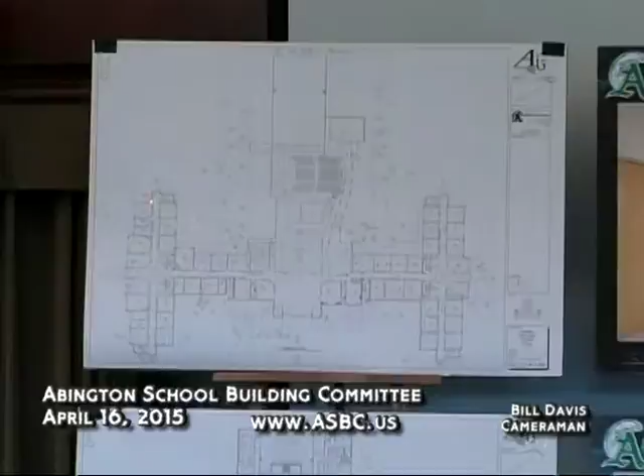What we've done here is benefited from the efficiency, the layout and efficiency of that with double-loaded corridors and the square footage, but we've changed the way we look at that corridor, and primarily the way the corridor wall, the demising wall between the corridor and the classroom, is positioned.

You can see with this rendering that each of the corridor walls opens up a corner to the classroom. So when you're looking down the corridor, you don't just see two parallel walls going down in a very closed-in institutional fashion.

Same with the end of the corridor — being able to see through along the corridor and to the outside with natural daylighting and views is extremely important. You can see that by doing that, we've effectively broken down the corridor into three zones within each of the wings, and allowed visual connection between the classrooms and the corridor.

We've adjusted the ceiling using a standard 2x4 integral linear fixture ceiling system, using patterns in the floor as well with the sheet linoleum product to create the zones and color variations. Durable materials on the walls, with porcelain paver tiles down low, and then a durable impact-resistant drywall for the walls.

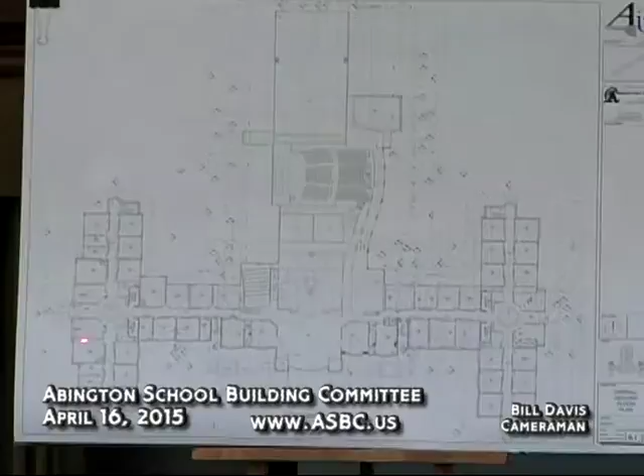So moving to the center core of the academic wing is the project labs, the maker-builder spaces. There are three vantage points of the maker-builder space.

The intention is to provide as much flexibility within this central core as possible, so that one classroom can come and do a project, multiple classrooms, or in fact you could take the floor or the academy and bring them into the center core with everything opened up as an assembly space.

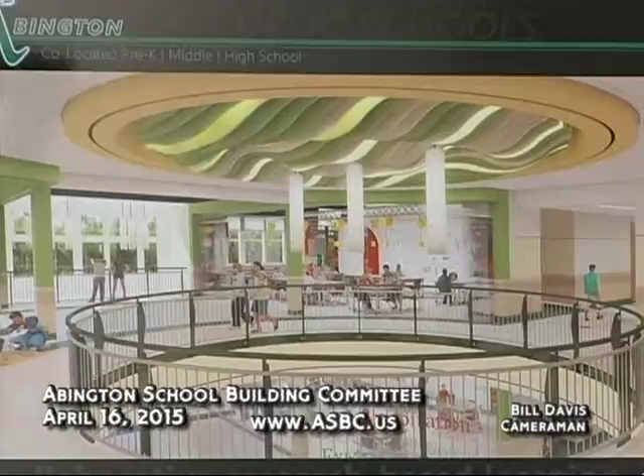What you see here are the three renderings. The first rendering, the top one here, is looking on the second floor across the space into this area here, this maker-builder space. Each of these is showing the floor penetration from the second floor to the first floor, and you can see through into the spaces on the lower level, as well as across to the spaces on that level.

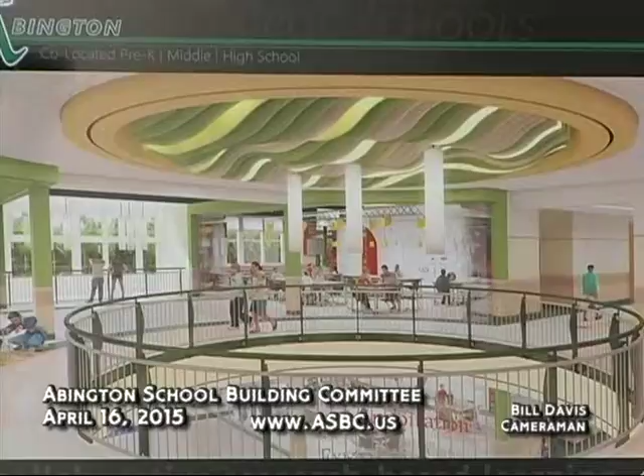The intent was to provide that visibility, that activity, the visual activity and the action, the inspiration that's going on within those spaces all day, so that the students see that work, be inspired by the work, and create interest and thought and inspiration of what's happening within the space.

So these areas are surrounded, in the majority of this section, by glass movable walls. Those are surfaces that can be moved open so that the entire area can be used, or just one room could be used, or one wall could be opened up and a portion of the entire space could be used.

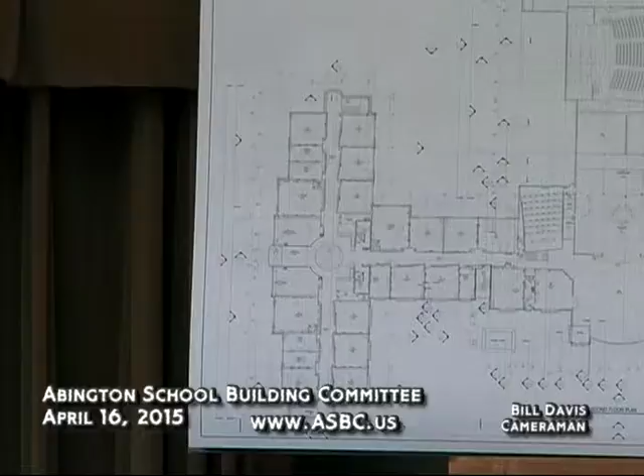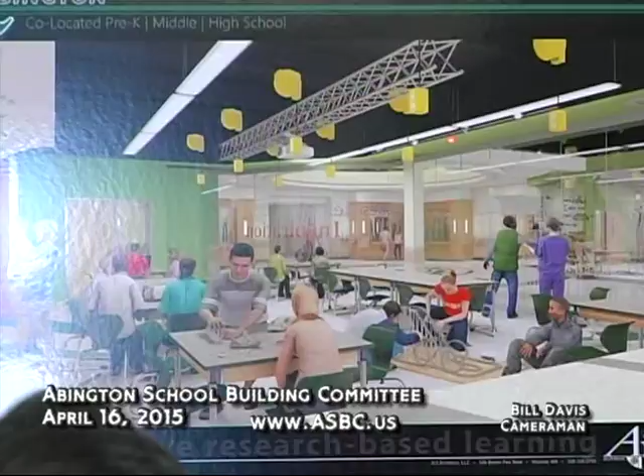The inside of the space is a very functional and flexible space as well. This particular vantage point is looking from this location across the space to this wall right here, and that's the primary work wall, teaching wall, where there's a 20-foot section of gypsum wall or drywall that has a painted surface that can be written on. So essentially, the entire wall, the students can use as surfaces to write on for research or diagramming, etc.

Flanking that wall, based on discussion with the user group, we tried to maximize the storage in that space and provide flexible storage. What you're seeing here is a rendered depiction of storage units, wall units that have the ability to place either bins or wire bins, plastic bins, any type of storage unit with flexible storage or flexible shelving. The size and configuration can be modified within these locations on either side of that writable surface.

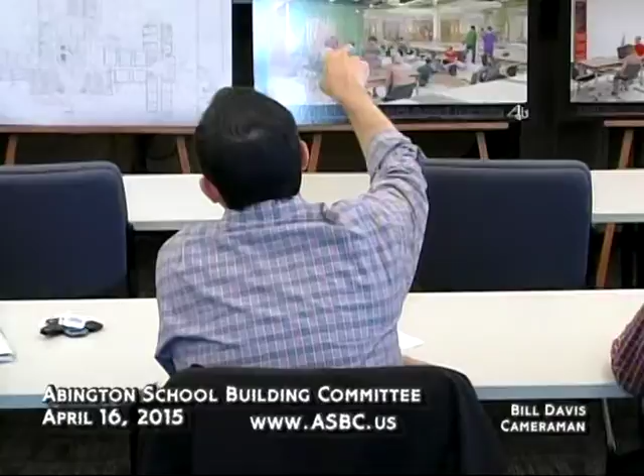So, right, see, there's in the corridor a datum at the top of the doors, 7'2" or whatever. Underneath that, are there areas for tacking posters or things like that?

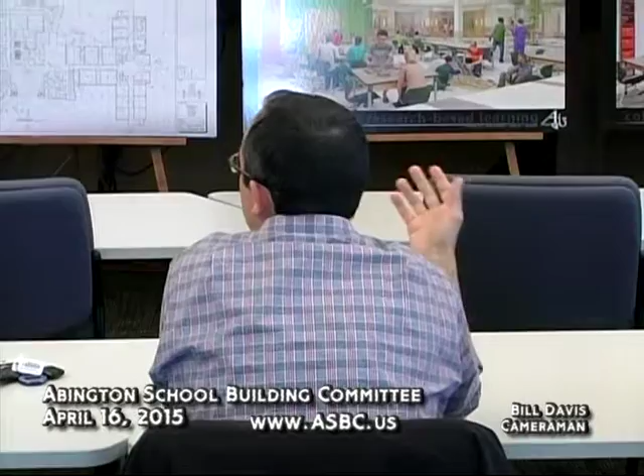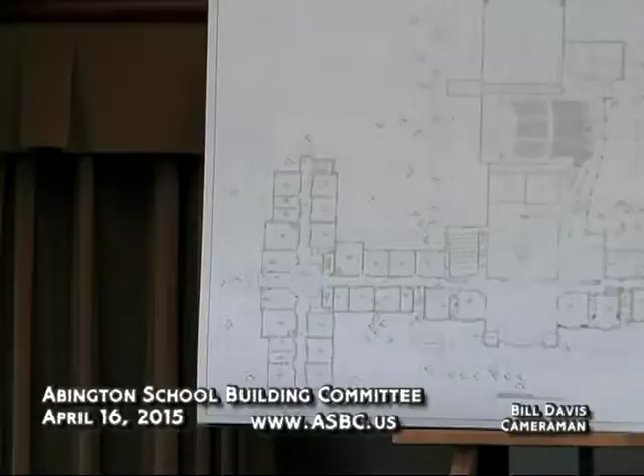Yeah, we identified, and because of the vantage point it's tough to see exactly the area. On the plan and on the sections of the corridor, we have designated areas for tacking paper products and student work, because typically the fire department frowns upon it, and actually under NFPA there's a requirement to make sure we're less than, I believe, 10% of the entire surface. So it needs to be managed and controlled.

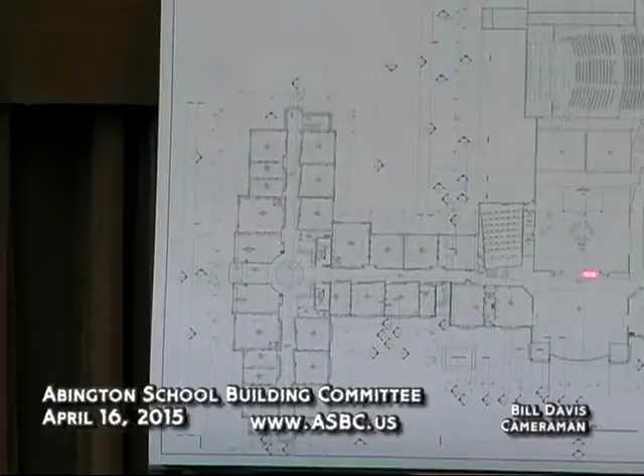That's why we've identified specific areas within the classroom wing, as well as within this central core area, with the display cases on this side as well as display cases here. There are displays within this corridor, and then obviously the displays we talked about during the other meeting on the public spaces. We've tried to control those zones in order to keep it either encased behind glass and not just placed on the wall surface, particularly in the egress corridors.

A number of years ago, I think probably around the time of the nightclub fire, they changed the fire laws from where you could hang stuff in the building. There's a specific number of feet from each doorway that you have to keep open, and there's a limit to how much overall.

Yeah, it was quite a big transition for those of us who were teaching at the time and trying to display our students' work, and the space that we could do that in shrunk considerably. I think it was about 5 or 6 years ago.

One more comment: we've had mixed results projecting onto whiteboards, especially when the marker doesn't completely get erased or things like that. We might consider having a projection screen come down in front of that, particularly for clear images.

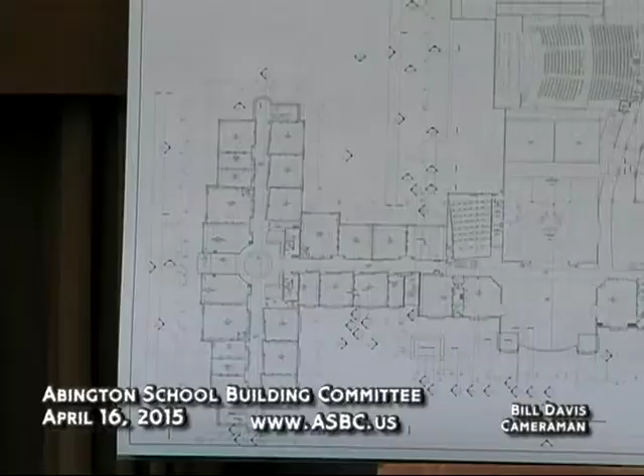Yeah, we're definitely, especially in maybe these locations within the building, it would be pretty straightforward to have a projection screen come down. It's really, you bring up a good point with the finish of this surface.

One of the things we'll identify in the specifications is a very high level finish, meaning a level 5 finish, which is the smoothest finish you can get with a drywall product when finishing plaster or finishing drywall, because if it has any pitting whatsoever, it will leave a shadow of what was drawn before. It's not a lot, but over time you'll see a little bit of shadowing. It's very important to make sure that finish is a level 5 finish, and that's not uncommon for something like this.

Troy, at one of the working sessions, you explained about the floor penetration and how it looks like it could be a problem, but you've got experience with other schools that were done where they've not had a problem with that. Could you explain that for us?

Yeah, sure. We talked about it, and it occurs on just about every single project: the idea of being able to have a penetration through the floor, seeing vertically through the first floor, second floor, and the concern that students will throw things down or start yelling to other students, whatever it may be. On every single project we've designed, we've had a scenario with a penetration through the floor, first floor, second floor, or third floor, and we haven't received any negative feedback from anybody in any other town related to problems after construction with students and penetrations through the floor. It's something that's asked every single project at the beginning of design, but we haven't had any comments back.

Why the exposed deck and framing? Has that been found better for ventilation? It's really breaking it up for a couple of reasons. This overall approach is less expensive than trying to put a 2x2, 2x4 grid from wall to wall, front to back, and it provides easy access to the ceiling. The ventilation will be the same whether you have the full ceiling or a partial ceiling as shown here. So that's to vary it from just a standard 2x2 ceiling grid throughout the entire building.

The high impact drywall, have you had good durability with that? Yeah, we have, and actually in the majority of the schools where we have drywall down low, we have installed impact resistant drywall, and in fact at the gymnasium, a few, actually the gymnasium at BC High, Boston College High School, there's plywood and drywall in there as well.

How about cleaning and durability for the writing surface? Is that something that needs to be considered?

It would be just like a typical whiteboard, because of the material applied to that drywall. I don't remember the number of scrubs it takes like a paint would, but it would be similar to a typical whiteboard surface. It would require repainting or reapplying at certain intervals. I don't know whether that's a year, 2 years, 5 years, but I can get that info for you.

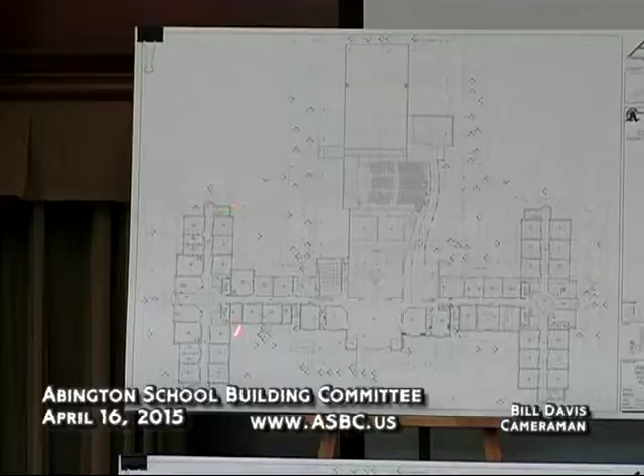Troy, in that upper top left rendering, is that a bank of lockers going down there on the left? This right here? Yes, it is. Okay, thank you. And those occur in 3 locations on each corridor wing. You have one in front of this classroom, and that occurs on each side as well. So each wing has 3 banks of lockers that are 12 by 12, double stacked.

Will there be linoleum flooring throughout, even in the classrooms? No, the classrooms are intended to be VCT. All of the corridors and public spaces, meaning the common spaces, are intended to have sheet linoleum. But we are also looking at using sheet linoleum in the project learning lab, since that's opening right up. That's the one area where we're trying to pull that into the space, since there's so much glass and it opens to the corridors and lobby area.

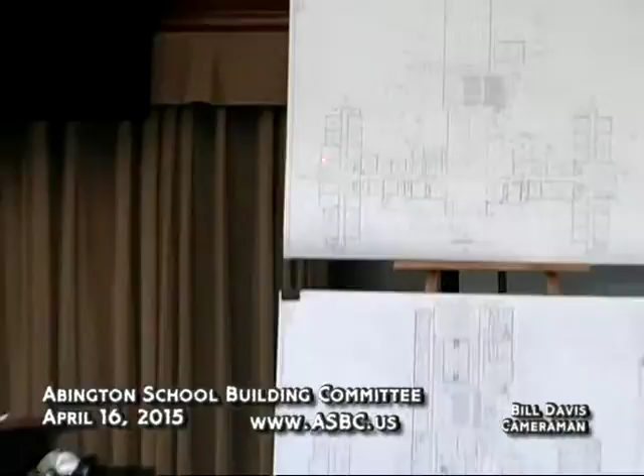Which type of surface is going to hold up better with the moving of chairs and furniture? Either surface is extremely durable, and they're widely used in both educational and institutional settings. The linoleum requires less maintenance than regular VCT, because there's no stripping or waxing for the linoleum. It's a greener product from an environmental standpoint. I just see the maker space as a place where furniture's going to be moved often.

Can you just say, the linoleum we're talking about is not the 1970s linoleum that your mother and father put in? It's a good point, let me explain it. It's not going to have like the kitchen I grew up in, with the tan, dark tan, avocado green, olive drab. No, it's a completely different product. It's more durable, more malleable. It's made with natural materials, oils, and other natural ingredients. It's a lower maintenance product. It won't have, like the linoleum back in the day had a pad, and then the top surface was hard, highly glossy, and if you broke through that top surface, that was it, you're done. This is a solid material where the color goes throughout, and it's adhered to the concrete fully. It's a very, very durable product.

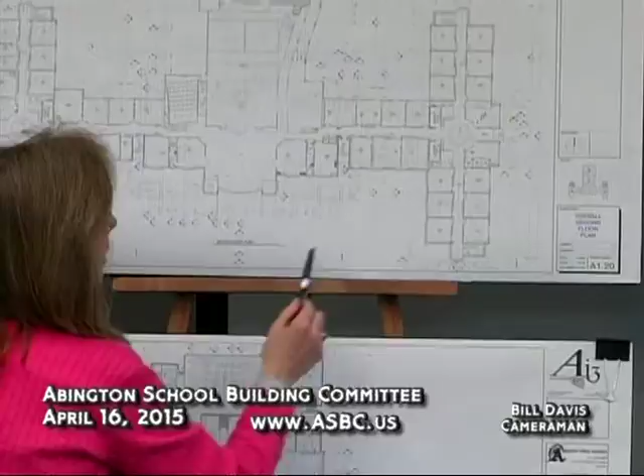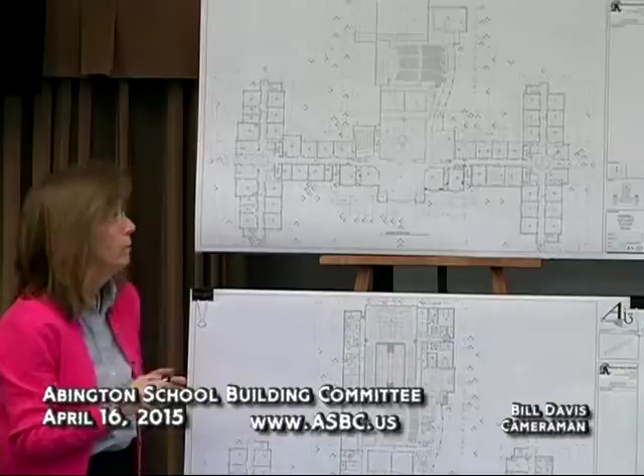The first is a standard academic lab, set up in rows of seating with computer terminals at each. The second is a language lab, a very specific technical lab based on language lab components and furnishings, which quite often have carrels at every learning position. The last is a business tech lab with a slightly smaller enrollment, which was asked to have a very flexible space so they could learn in different areas and through different types of equipment.

Having talked to the administrators at the high school, what they've asked is that we try to have a more global approach to all of these labs so that they are more flexible spaces, and that we move away from a specific design language lab to a lab that could be set up for a minor language lab through computer equipment, or it can be used for various computer training. So we are starting to look into that.

Terry Sullivan was very helpful to supply us with some information and a video about a college computer lab setup that she's more interested in, which is more kind of pods in each section of the building rather than rows or aisles of computer stations. So we're working on that. We want to make you aware that we are getting away from that very specific language lab because there's a pretty premium cost on one of those labs, and it takes out some of the flexibility of the specific classroom location. We'll probably have updates on those locations as we move further and advance the design.

Mary, did you also want to discuss the lighting along Gliniewicz Way? Yes, lighting along Gliniewicz Way. One of the alternates included in the proposed project was a section of light improvement along Gliniewicz Way where we have those new parking spaces, angled parking spaces at that front natural turf field.